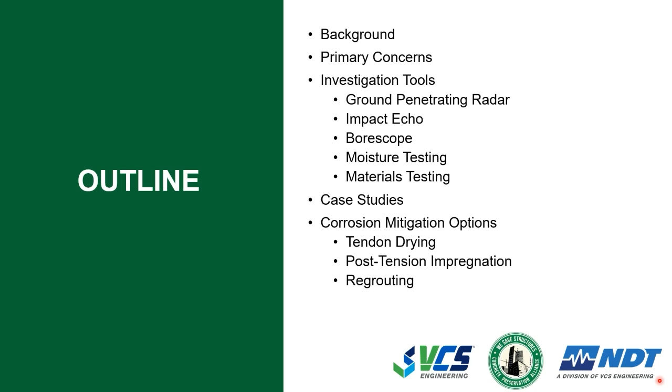In terms of the outline, I'll be going over a brief background of PT structures in the US and globally, what are the primary concerns they face, what are the typical investigation tools we use to probe the corrosion susceptibility of those structures. We will go over a couple of case studies and then into rehab options or corrosion mitigation options.

To dive into a brief background about post-tensioning structures, the concept of post-tensioning was first introduced in 1928 by a French structural engineer, Eugene Freyssinet. As a consequence of developing those ideas, the first post-tensioning bridge was constructed in France in 1941.

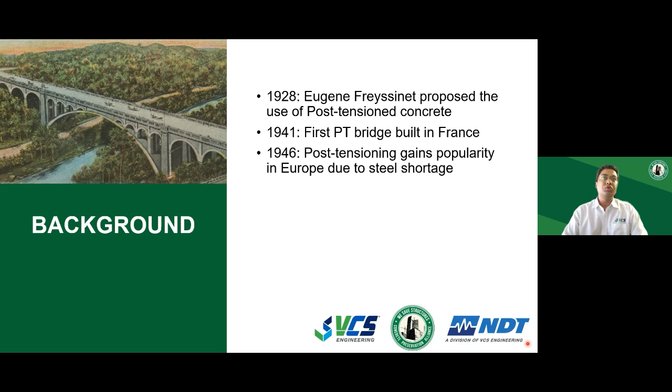Especially during World War II, where there was a significant steel shortage, post-tensioning structures gained popularity owing to the steel shortage, making the use of rebar less prevalent. In the United States, the first PT bridge was constructed during 1949 to 51 - the Walnut Lane Bridge in the Philadelphia area. These PT structures are structurally efficient and allow us to build really long spans.

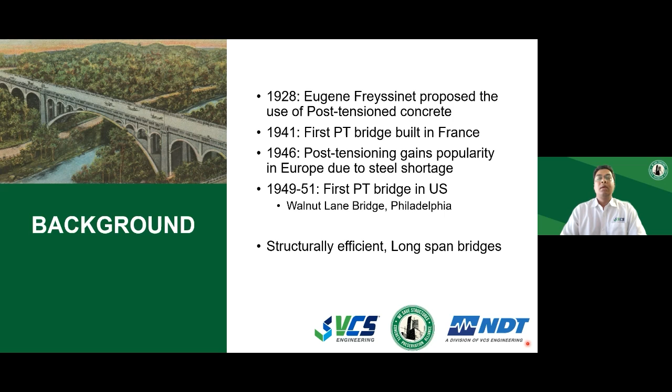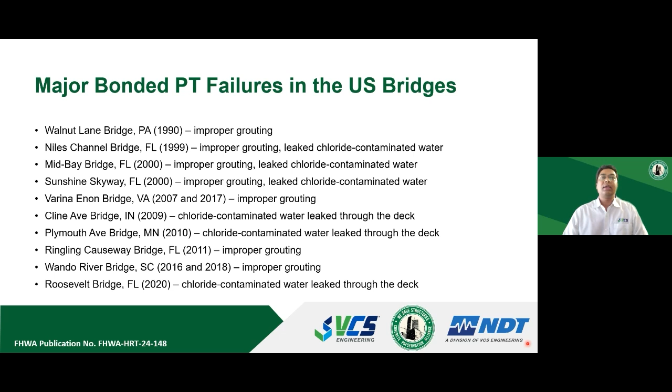In terms of history, I'd like to briefly go over the major failures that have happened in US bridges. If you note all of these failures, almost all of them can be attributed to either improper grouting or ingress of chloride contaminated deck runoffs. Essentially, when it comes to durability of post-tensioning structures, what matters is the homogeneity of the grout near the tendons and how well the voids were poured.

Speaking of causes that lead to PT corrosion, there are two main culprits. One is improper grouting operations or improper grout material. It can result from water bleeding or excessive water in the grout mix, or from segregation of the grout material. Sometimes, inadvertently or accidentally, chlorides might be added to the grout in the form of admixtures, resulting in higher chloride levels exposing the strands, which results in corrosion.

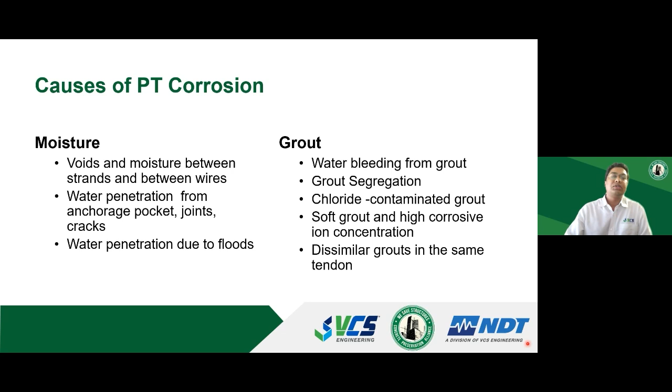On the other side, we have moisture and external contaminants, which can be introduced into the duct through end caps or through cracks in the duct. That can result in an environment very conducive to corrosion of the post-tensioning strand. I'll go over these concerns in the subsequent slides.

Here are some pictures which highlight typical failures. The one on top is a bridge in Pennsylvania. Here you can see the regular conventional steel reinforcement. You also see a post-tensioning duct that is completely eaten out or corroded, and now you have the strands exposed to chloride contaminated runoff from the deck.

Essentially, the rebar corroded first. It led to cracking and effectively spalling of the concrete, which created a direct path of chlorides to the metal duct, resulting in severe corrosion and heavy section loss of the duct. Effectively, that resulted in exposure of the tendons.

In the bottom images, you can see the external post-tensioning system where you have obvious grouting defects or voids in the duct that led to exposure of tendons to elements like moisture, chloride environments, or a lot of oxygen, which resulted in corrosion of the tendons. In some cases, the damage was so severe that the tendons were completely severed, resulting in complete failure of the tendon.

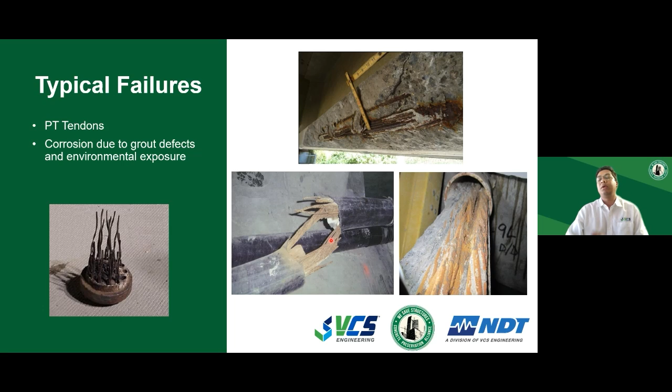When it comes to failures and segregation of grout or grouting defects, the profile of the tendon matters a lot. If we're talking about a straight profile, there's a high chance that during grouting operations the tendon will be uniformly coated with the grout material, which is of high pH, highly alkaline in nature, and that high pH or passivity can protect the steel from future corrosion.

Whereas if you have a deviated tendon, an inclined or vertical tendon, you tend to see grouting defects being more prevalent, especially because some sections of the tendon could be completely exposed while others are completely grouted. In the exposed sections, you have no protective oxide layer formed by the highly alkaline grout, which is why you see higher susceptibility to corrosion and eventual failure in those uncoated or unbonded sections of the tendons.

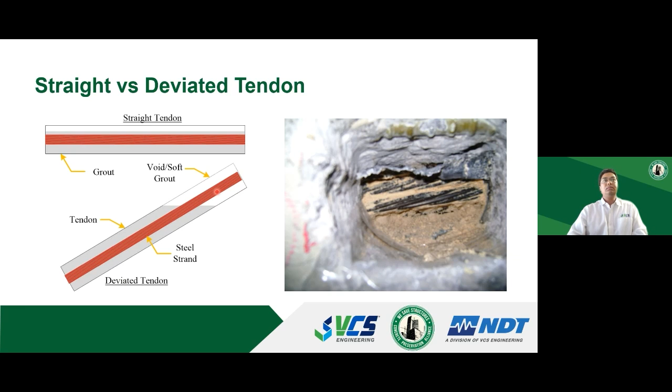Sometimes, when you have high amounts of water in the grout, that can result in segregation, where the heavier cement particles tend to settle down and cure or consolidate first, resulting in bleed water on the top layers. As you keep consolidating or curing the grout, it keeps pushing the bleed water up, and you get increasing water to cement ratio. As a consequence, you tend to see higher levels of contaminants or deleterious species like chlorides or sulfates toward the top because of the excessive water or higher water to cement ratio.

What it results in is incompatible material in the same duct. Even if the duct is completely full of grout, you can have segregation, and that will result in an incompatible mix where the top tendons are exposed to a very powdery grout, or a grout of higher water to cement ratio.

It can be clay-like, or when the water has completely dried out, it can be powdery material, and that provides essentially no strength or no bonding. Whereas at the bottom, you have really good bonding to the grout.

This chemical incompatibility and strength incompatibility can result in corrosion, where the top tendons can experience significant corrosion because of lower pH or lower alkaline environment, whereas the bottoms are completely immune to corrosion, especially because of the high pH grout surrounding them. So segregation and voiding defects are two key concerns when it comes to bonded post-tensioning structures.

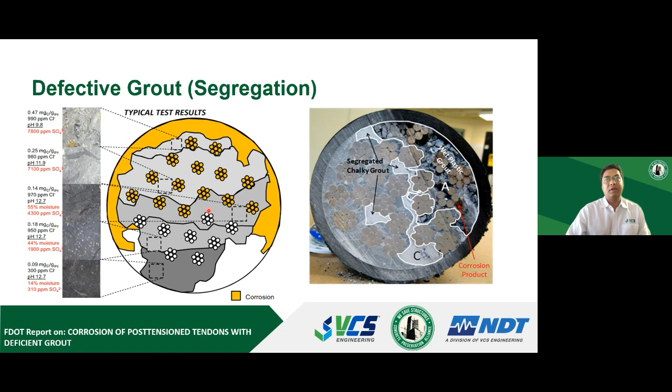Now we know what the key concerns are and what are the species that might lead to corrosion of the post-tensioning strands or tendons. We have some investigation tools at our disposal which we can use to probe the PT structures and see what the potential areas of defect are, or where the areas of issues are.

In today's presentation, I'll go over a couple of techniques for how we investigate the structure, how we probe the post-tensioning strands, visual confirmations. I'll go over ground penetrating radar, impact echo pulse velocity - which is essentially an acoustic technique - and borescope imaging. This gives us visual confirmation of our GPR and impact echo techniques.

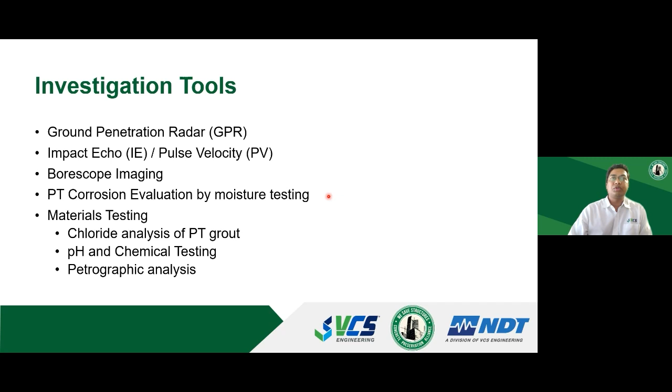Then we have moisture testing, which gives us the probability or the risk of corrosion the strands are at. And eventually we'll go into the material testing.

So to begin with, for all internal bonded post-tensioning systems, any investigation starts by locating the tendon, and we use ground penetrating radar to locate the tendon or the metal ducts. It's a fairly straightforward technique where you send an electromagnetic wave into the concrete and wait for the reflections to come back.

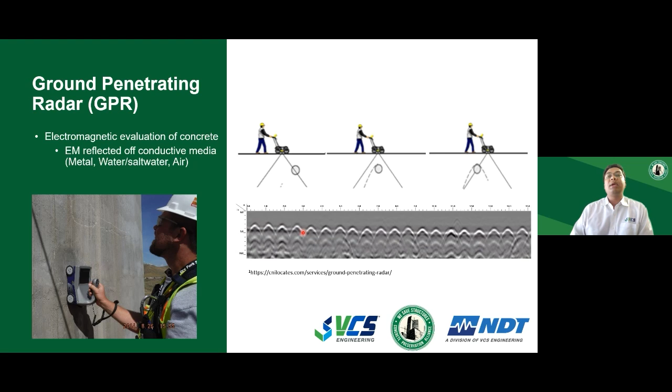On this chart or graphic you see here, each peak or each parabola is the presence of a steel object. That steel object can be reinforcing steel or it can be a post-tensioning duct. To an experienced eye, it's easy to discern between the reinforcing steel and the post-tensioning ducts just by looking at the contrast signatures or the peak signatures.

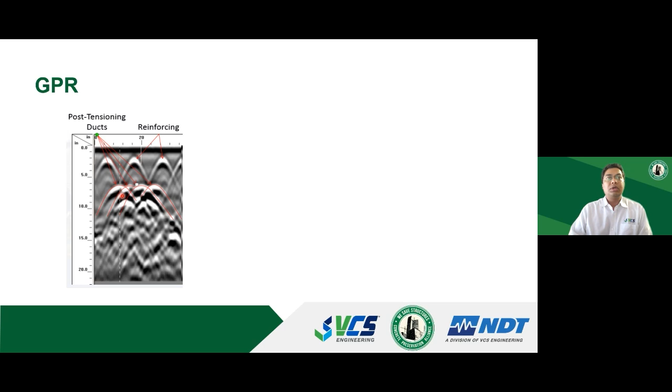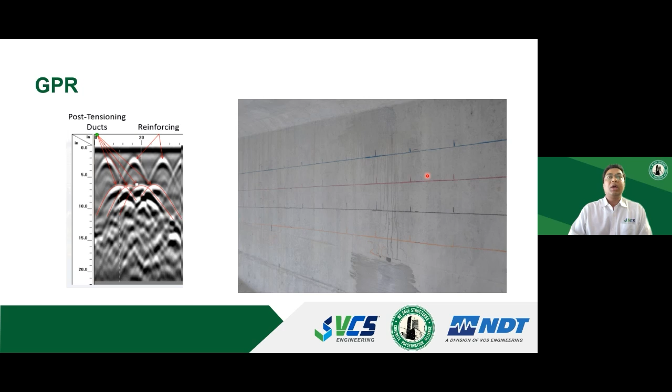Once you do the GPR scans, you lay out the drape of the tendon to track the profile of the tendon, and we mark that profile every 1 foot for subsequent testing using maybe sonic or some other testing. So once you lay out the profile of the tendon, you often use sonic or ultrasonic - we call it impact echo or pulse velocity technique.

Essentially, this technique relies on sending a sound wave, or a sound signal - you can call it a mechanical wave or stress wave - into the concrete and waiting for the reflections to come back from the back surface and also from the duct surface.

Essentially, you place the sensor and make an impact using a pneumatic impactor. You send the sound waves in. If the duct is completely full of grout, then you will have a quicker reflection, whereas if you have an air void or any voids present in the duct, then it might take a lot longer for the sound wave to come back to the sensors. This is essentially analyzed in the frequency domain.

Our device can do impact echo and pulse velocity both at the same time, but when it comes to applications for post-tensioning, we more often rely on impact echo than anything.

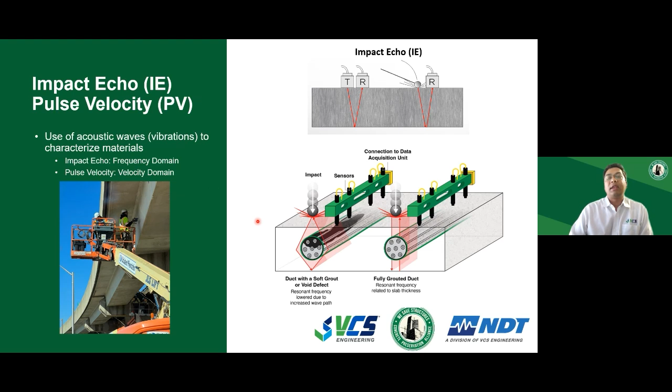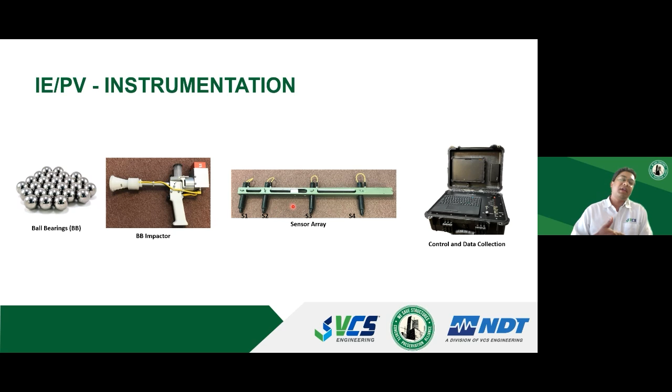In terms of instrumentation, as I mentioned, we use a pneumatic impactor. We use steel ball bearings to make the impact on the concrete surface above the tendon. And then we have a sensor array which has 4 sensors waiting for the reflections to come back, and that gives us the data.

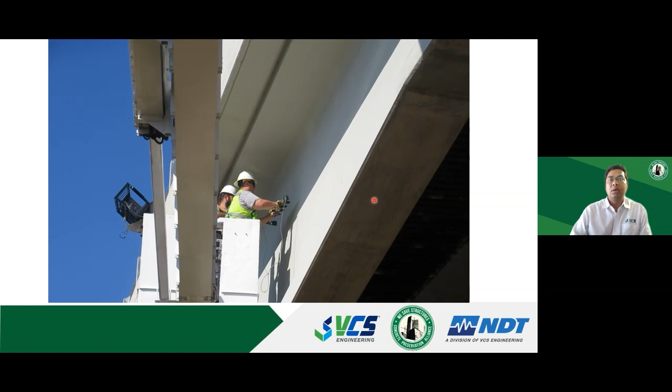So you make an impact, you place the sensor, make an impact, place the sensor, make an impact, and it collects the data while you're doing so. And you can see the pace of the testing - it goes pretty fast.

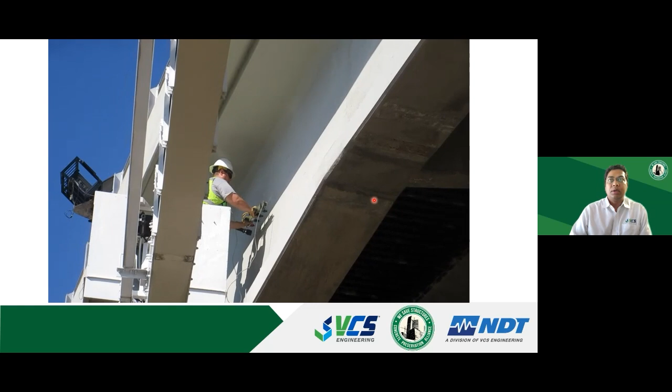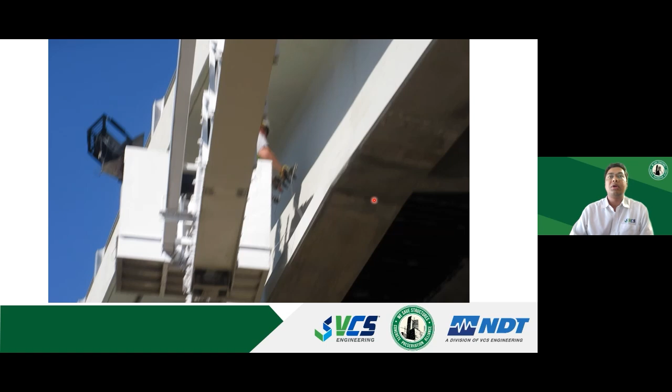So you lay out the tendon and do the impact echo testing - this is the system we use for internal tendons. We can use a similar system for external tendons where you have a transmitter and a receiver on opposite ends of the external post-tensioning duct, sending a signal from the transmitter and receiving that sound signal at the receiver.

You have an idea of the exact diameter of the duct, and that helps us know if defects are present and to what extent. Usually we do this testing at the 10 o'clock, 2 o'clock, 4 o'clock and 8 o'clock positions, performing comprehensive testing to see if defects are present and to what extent.

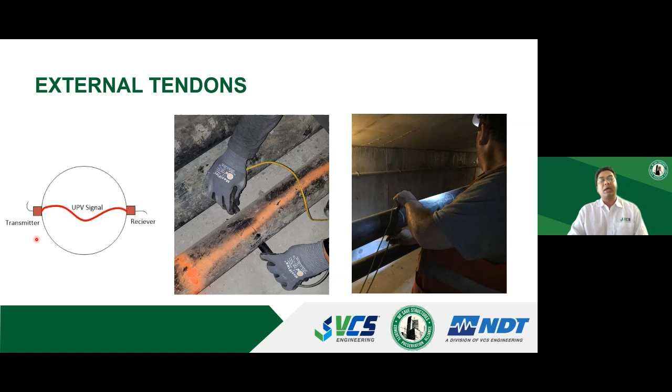Once you have identified the extent, location, or areas of potential defects, we need to visually confirm if the defect is actually present or if it was a false positive. One way to visually confirm the results of impact echo testing is using a borescope. We make an opening in the concrete, open up the metal duct, and put a pinhole camera into the duct to see if voids exist or not.

In most cases, if a void exists, you'll be able to put the camera through the duct and see what's happening inside. One of the images shown here shows the tendons completely coated with grout, but the rest of the duct is completely empty - you do not have any grout whatsoever, so there is a large void there.

In the second image, you see surface corrosion of the post-tensioning strands.

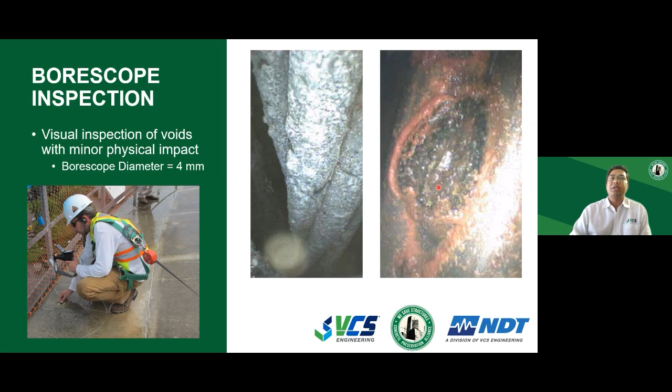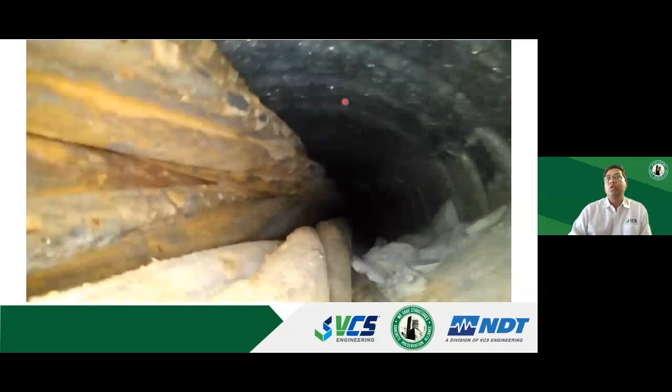This video is from one of the projects we were recently working on. You can see in the video that the top half of the duct has no grout whatsoever, whereas on the bottom half you see some history of grout, and you can see severe or heavy surface corrosion of the strands.

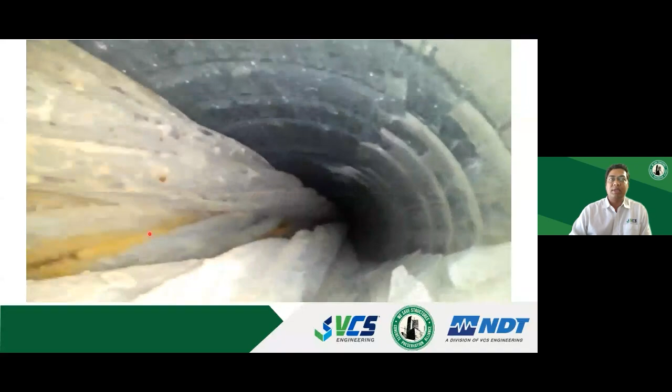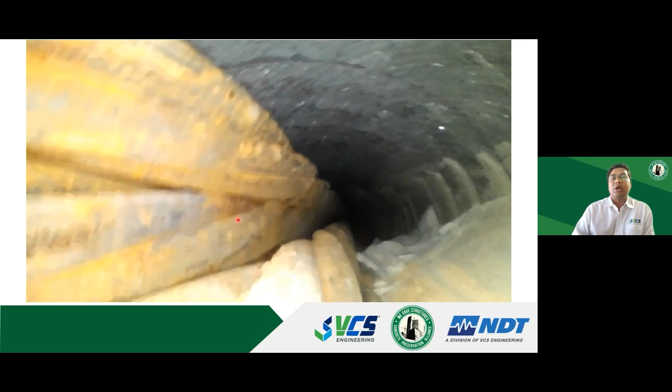In this case, since you do not have the high pH environment usually provided by the grout, you do not have any passivity or form of protection. So if moisture or chloride-contaminated water were to seep in, it will get directly in contact with the strands and start surface corrosion.

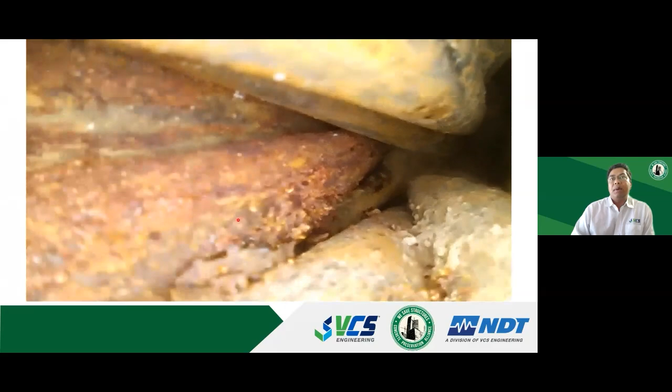Same project, another video that shows significant section loss and pitting on the strands - you can see these strands are heavily corroded.

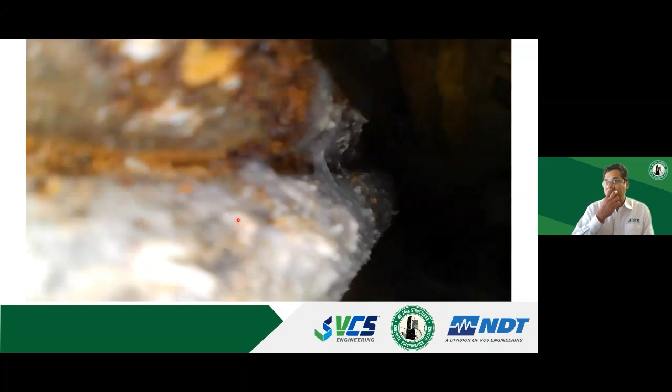Just the fact that you are able to put the borescope in should raise a lot of flags, because if you're able to put a borescope in, obviously there is a void present. If a void is present, the next question is whether the strands are corroded because of contaminants or moisture that may or may not have gotten in.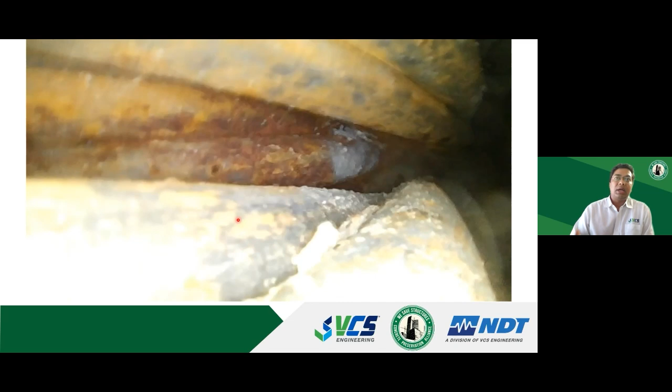Obviously you have a large void. The strands are completely exposed and you have no protection of any sort, and on top of it you have freestanding water. It's an ideal scenario where corrosion would most likely happen, and you can see some patchy corrosion already happening there. This is an alarming sign that failure is ought to happen in the future.

Another example is duct corrosion - it's completely voided, no signs of grout, and you have a Dywidag bar with severe surface corrosion. You have severe section loss in some other cases, but in all cases you can see that the borescope was able to go into the duct, which is a sign that there is a void present and you need to do something about it.

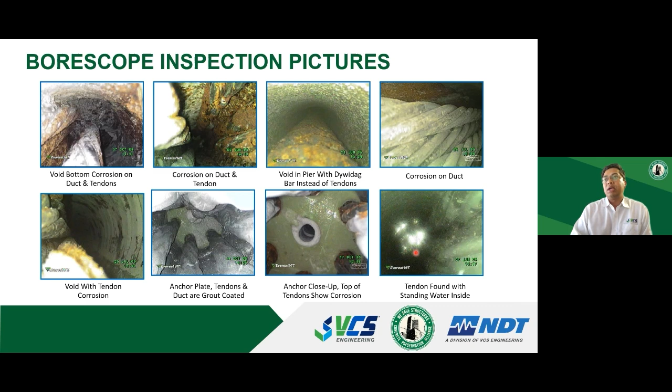If there is any freestanding water or if the relative humidity inside the duct is pretty high, there's a high chance that the exposed tendons will corrode. With increasing relative humidity or moisture, the corrosion rate goes up. The higher the corrosion rate, the more the section loss and the quicker it will occur. And if you have section loss, those strands will fail due to being under immense amount of stress.

To measure the relative humidity inside the duct, we use something called moisture testing, where you drill into the concrete and into the duct, making maybe a half-inch or quarter-inch opening. You have an in port, a similar out port, and a flow meter, and you push a dry gas through the duct. Essentially, we are trying to measure the relative humidity inside the duct using a dry gas.

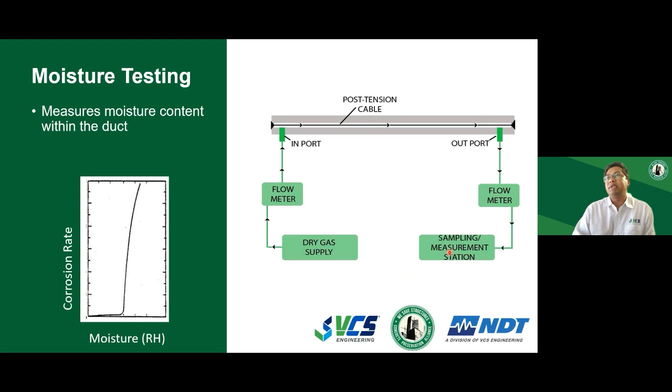Dry gas will absorb all the moisture it can, and we measure the moisture content on the output to see what the relative humidity inside the duct is. Based on the relative humidity, you can classify the tendon as dry, moist, or wet. If the relative humidity inside the duct is pretty low, you land up in a dry zone, which means the tendons are less susceptible to moisture-induced corrosion.

Whereas if you have a relatively higher humidity, your tendons might end up in a moist zone, where you have slightly higher chances of moisture-induced corrosion. And if the relative humidity is high, you land up in a wet zone, where you have an extremely high chance of corrosion being initiated because of moisture.

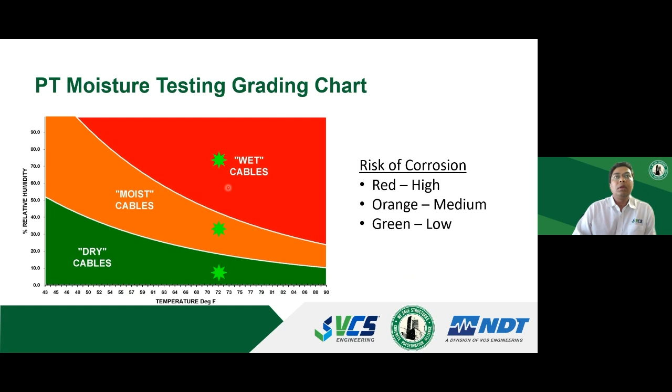Beyond moisture, there are other factors that affect corrosion, like availability of oxygen, presence of grouting, and so on. But knowing the moisture content gives a lot of insight into how much corrosion we can expect on the tendons. In addition to these tests, we often do material testing, which includes measuring the pH of the grout, measuring the chloride content of the grout, and doing petrographic analysis on the grout material. I'll let my co-presenter Natalia talk about it some more.

Thank you, Pratik. The materials testing that is typically conducted on grout samples is pH testing, chloride concentration testing, and less frequently, petrographic analysis.

pH testing is typically done at large openings where a section of the duct is removed to expose the grout. You can use a rainbow indicator solution, which changes color depending on the pH range, or you can use a phenolphthalein indicator, which is what you see in this photo. The phenolphthalein indicator changes color to pink when the pH of the grout is above 9.5, and if it's below 9.5, it remains colorless.

If there is a suspicion of environmental exposure to chlorides leading to chloride contamination of the grout, it's a good idea to test the chloride concentration of the concrete surrounding the duct, in addition to testing the grout. In this example, we collected 3 grout samples from different tendons. Sample 1 was collected at a high point, samples 2 and 3 were collected at low points of the drape. There was some leaking from the deck, and a concern that chloride contamination was coming from exterior exposure to chlorides, so we collected concrete samples near grout sample number 3, shown in the table below.

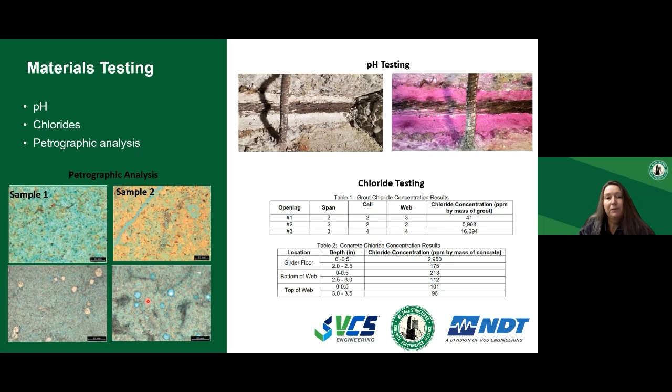So we're going to present 3 different case studies today that illustrate the use of different techniques that Pratik had discussed. Our first case study will be on testing of post-tension bridge piers.

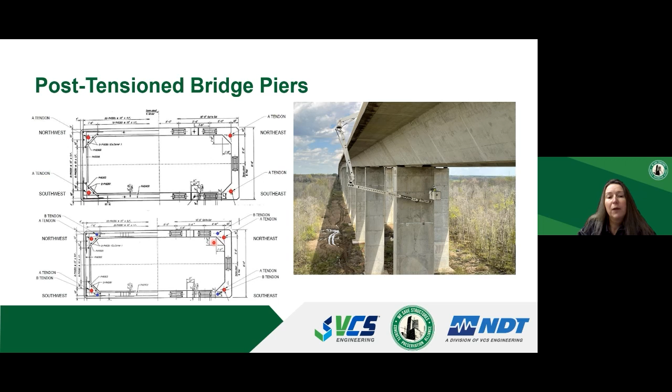This bridge is located in Virginia and uses U-shaped post-tensioning tendons in all the piers. All the piers have these A tendons, colored in red circles on the cross sections on the left side of the screen. The river piers, shown in the cross section below, have an additional pair of U-shaped tendons colored in blue circles, referred to as B tendons.

Next, please. Our testing focused on the 25 feet of the tendons at the top and bottom of the piers. For B tendons in the river piers, because they extended into the girder, we were also able to test them inside the girder.

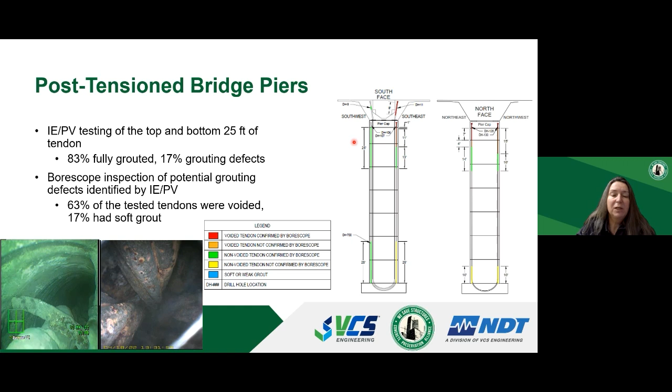We performed impact echo testing followed up by borescope inspection. As Pratik mentioned, impact echo testing can't differentiate between different types of defects. Grouting defects can be benign - lens voids or rind voids that do not expose the strands to the air, so the strands are fully coated. However, there is a void between the grout and the duct, and this will be picked up by impact echo testing as a potential grouting defect.

While other defects, such as voids that do expose the strands, and soft grout, create a corrosive environment for the strands. So based on the results of impact echo testing, we selected locations for borescope inspection, and this helps us differentiate between different types of grouting defects identified by impact echo.

Based on impact echo testing results, the majority of the borescope openings are located at defect locations, and we do some openings in fully grouted ducts as well for verification. So when the results are combined at the end of the project, we produce drawings, shown on the right side of the slide, where the tested tendon sections are color-coded based on impact echo and borescope results.

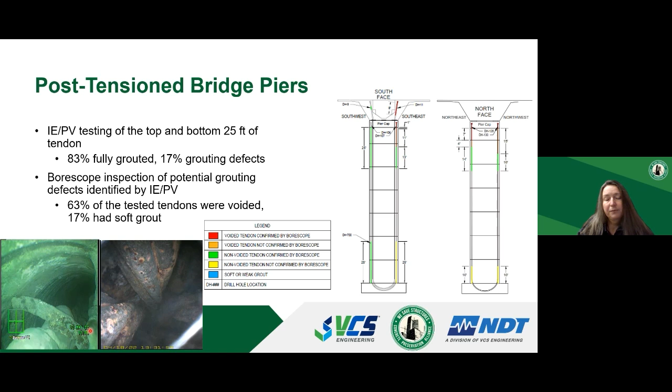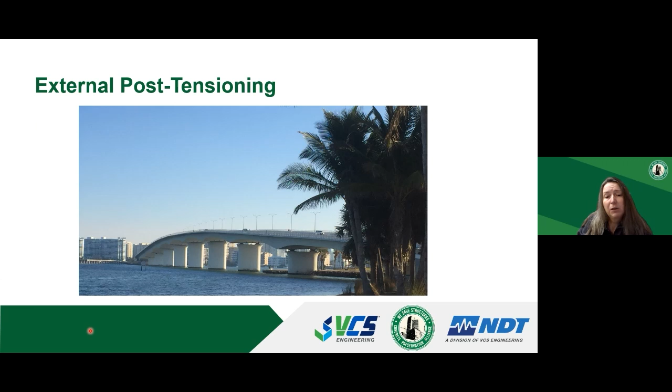Next. Okay, our second case study is going to look at testing of external post-tensioning. This is Ringling Bridge in Florida that uses external post-tensioning inside the girders. The investigation for this bridge was initiated by a tendon failure.

The photo on the left shows the impact echo testing of external tendons, and the image in the middle of the slide shows the impact echo and pulse velocity data that was collected on a fully grouted tendon.

Although our device collects the impact echo and pulse velocity data at the same time, for locating grouting defects we don't really use the pulse velocity data because it's looking at the time domain. We look at the impact echo data. The principle here is that the frequency with which the wave resonates in a concrete section is related to the thickness of the section.

When we have an internal or an external tendon that is fully grouted, we will be measuring the frequency that corresponds to the true thickness of that element - whether it's the true diameter of an external duct or the true thickness of the web or the deck for an internal tendon. As you can see in the middle image, the impact echo data shows a very consistent frequency for all the measurements.

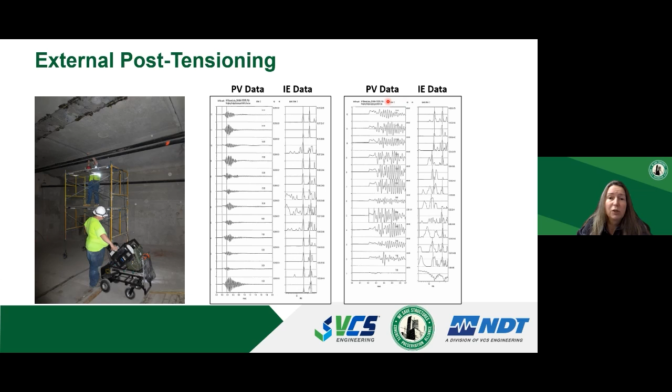Now, if we look at the image on the right, it's a very different picture. Here, the data was collected on a tendon with grouting defects, confirmed to have voids. If we look at the impact echo data column, the frequency is all over the place. There's a significant change in the signal shape that indicates scattering of the wave by the presence of the voids. Actually, if we look at the pulse velocity data as well, there's a significant change in the signal shape.

Next, please. So here the owner decided to remove some of the voided ducts, and these images show some of the duct sections that were removed from the bridge. Here we see a void at the top of the duct in both of these sections, and corrosion on the surface of the exposed strands.

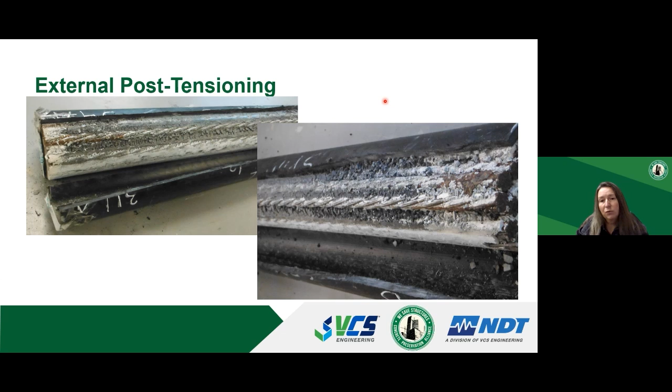In the third case study, we're going to take a look at evaluation of post-tension pier caps.

Impact echo testing can only be applied when the thickness of the element is 2 feet or less. At greater thicknesses, we're not able to locate grouting defects with our device. These pier caps were significantly wider than 2 feet, so we couldn't use the impact echo testing approach.

Instead, because the anchorages on these pier caps were easily accessible, we removed the pour backs and did visual inspections of the anchorages. As you can see on the slide on the bottom, we found some missing grout caps, and on the top, the image shows voids in the grout caps at some locations. Where there was missing grout, there was heavy corrosion on the anchor plates, as well as strand tails.

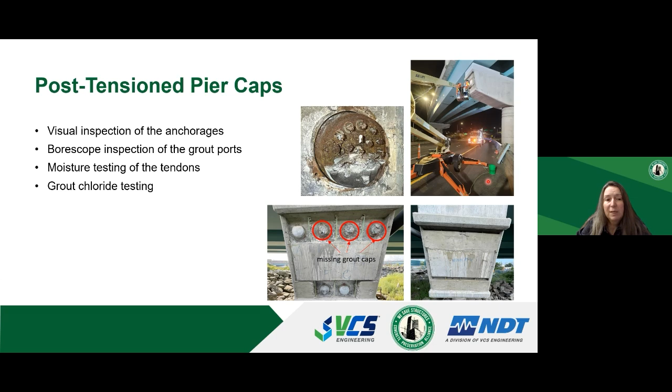So in addition to the visual inspection, we did borescope inspection of the grout ports, moisture testing of the tendons, and we also sampled the grout for chlorides.

This slide shows an image of the borescope inspection where the technician is feeding the borescope through the grout port. This was done on the grout ports that were empty. Obviously, we were not able to do it on grout ports that were full. Good news, the majority of the grout ports on this project were in fact full.

In the grout ports that were voided, 6% had lens voids that are benign and don't put the strands at risk for corrosion, and 13% were fully voided. At the bottom of the slide, you see some typical images from the voided grout ports.

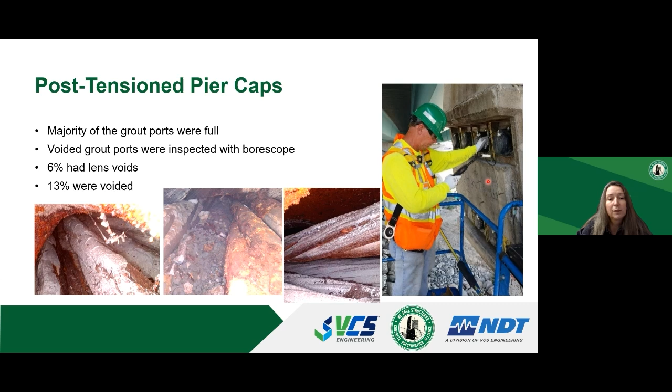We also performed moisture testing, where we pushed dry air from one end of the tendon to the other. As you can see on this chart, the majority of the tendons were in the dry-wet or wet condition, which puts them at risk for corrosion.

The chloride samples of the grout showed that the majority of samples had chloride concentrations below the corrosion initiation threshold, and only one sample had a high chloride concentration. This was because the pour back actually didn't cover the grout port at that location. It was left exposed, and chloride-contaminated water from the deck ended up getting in there.

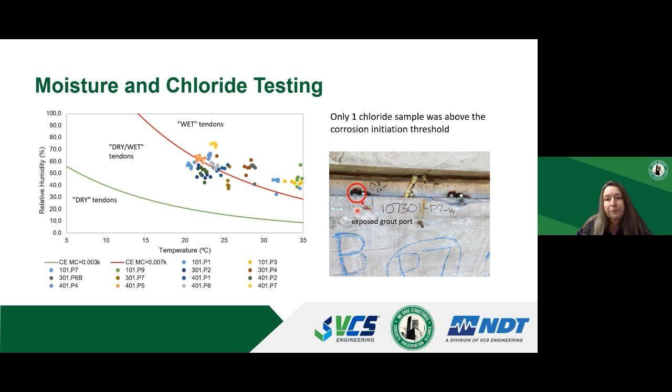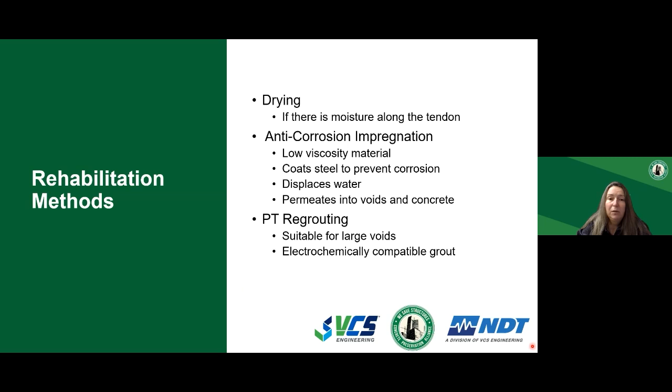So once we locate the different grouting defects, what can we do to mitigate corrosion of the strands? We have three different options: we can perform drying, anti-corrosion impregnation, or regrouting.

If there is moisture present in the tendon, if there's bulk water or high moisture, the tendon can be dried out. The PT drying process is very similar to the moisture testing process described. There is a supply of dry gas that's connected to an import, typically placed at the bottom of the tendon drape if possible. It's not always possible depending on the setup.

There can be one or two outports connected to a flow meter that is also connected to a moisture meter recording the relative humidity and temperature coming out. The dry gas supplied through the import pushes the air inside the tendon through the outports, and this process continues until the air inside the duct is dried out below the threshold line that separates dry tendons from moist tendons.

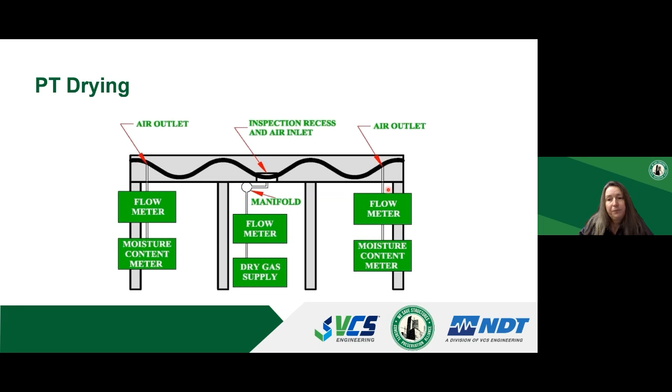This is an example from an actual PT drying project in Florida. This was done on a bridge that had bonded PT in the I-beam girders.

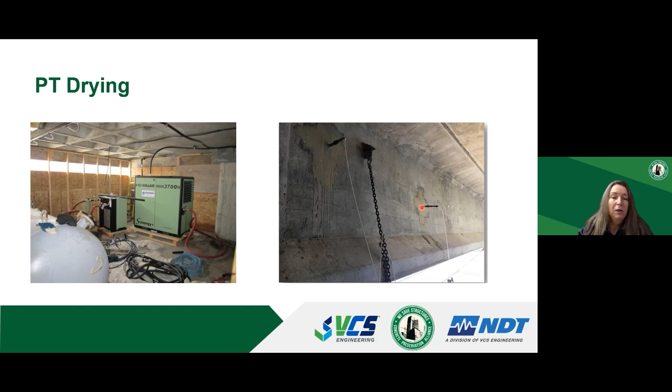On this project, we used a remote monitoring system, so that tubing was connected to this system being set up in this photo. The black case had a data logger that sent all the data to a website, so it could be monitored remotely.

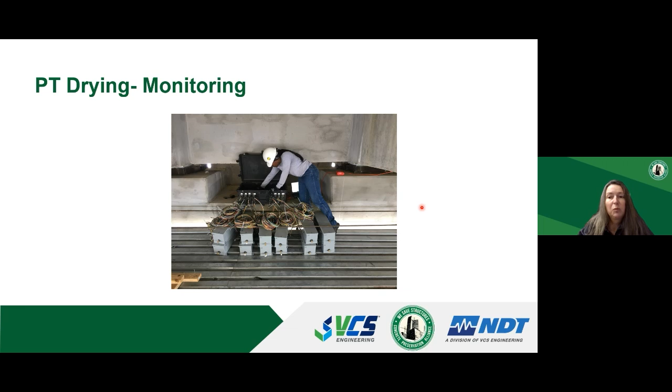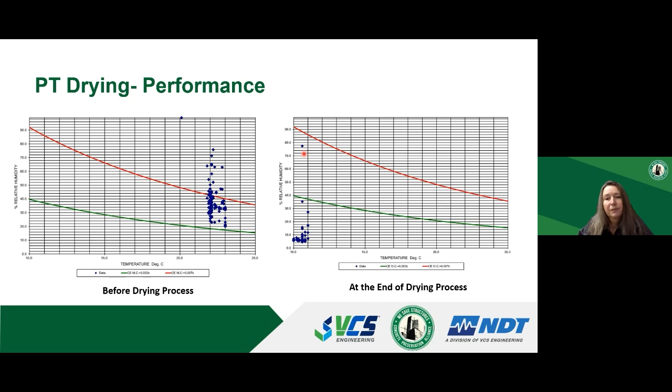The next technique is PTI, or anti-corrosion impregnation. This can be done when there are voids in the duct. If there's significant moisture, it's recommended to dry the tendon first before doing the impregnation. Impregnation is also very effective in addressing areas of soft grout.

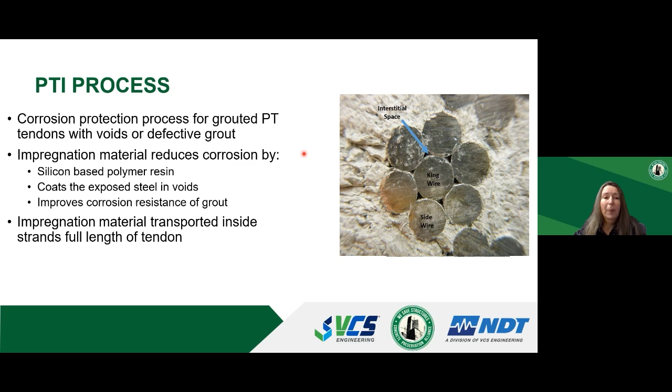During the impregnation process, a low viscosity silicon-based polymer resin is injected into the tendon. It can be injected through the anchorages or at any point along the tendon length. This material has an extremely low viscosity and travels inside the interstitial spaces around the king wire, coating the exposed strands in an anti-corrosion coating. This material will also penetrate into the voids surrounding the strands and areas of soft grout.

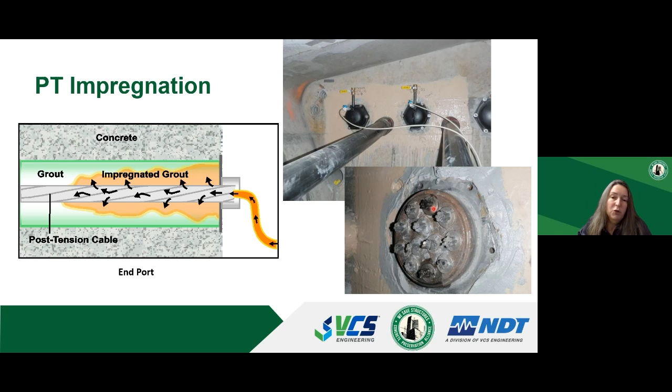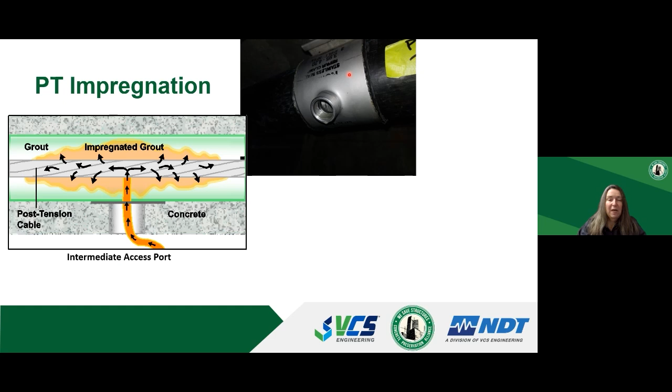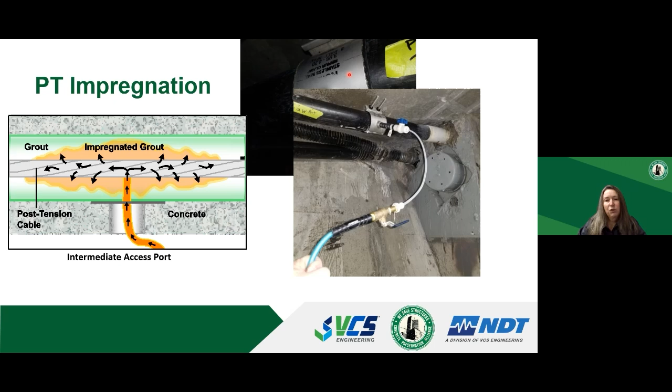This slide shows impregnation for an internal tendon at a point away from the anchorage, and the photo shows impregnation of an external tendon. For external tendons, there is a saddle attached at the impregnation point. An opening is made through the saddle, and then a port supplying the impregnation material is connected through the saddle, and the impregnation begins. After the saddle is removed, the impregnation can be confirmed.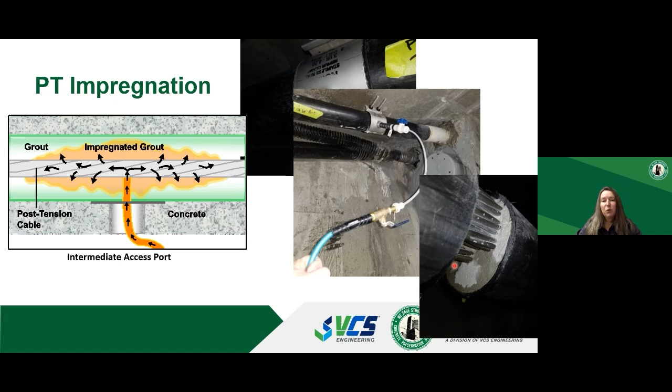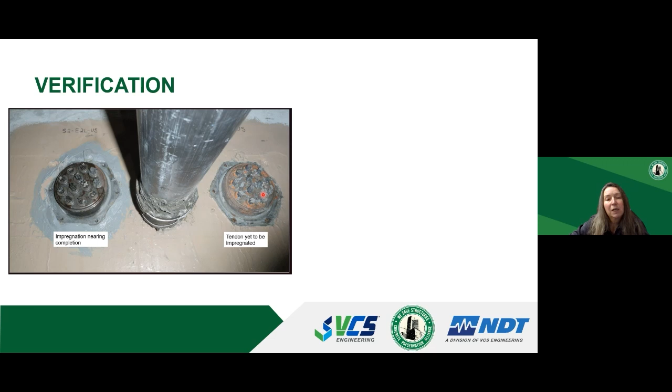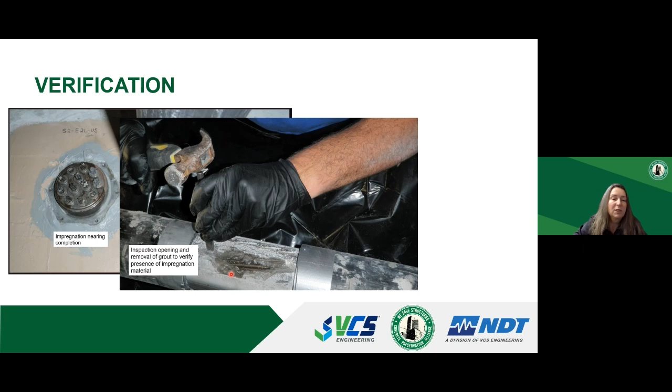Here is a verification of PT impregnation. Again, you have the darker anchorage on the left, coated in the impregnation material, and on the right for comparison is the anchorage that has not been treated yet. Here's another verification opening, again showing the darker color of the grout, confirming that the anti-corrosion material got to that point, and here's an up-close view showing the higher sheen of the strands from the coating.

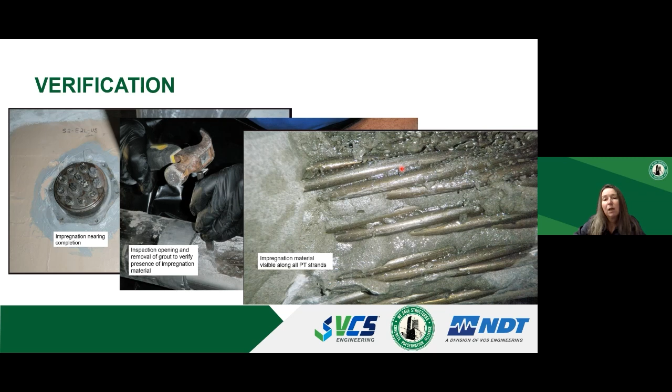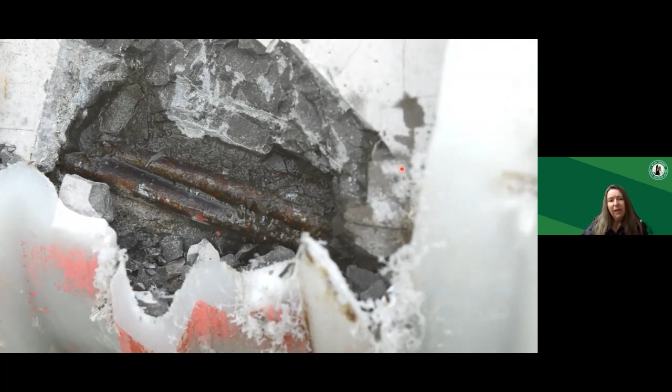This video shows the impregnation material bubbling through, as it's being pushed out at this opening.

Our last technique is regrouting. When there are large voids present along the tendon, the tendons can be regrouted. Grouting can be done using the positive pressure approach, shown here, where grout is pushed in from the low point and the technician watches for the grout to come out at the high point of the tendon drape.

Grouting can also be done using vacuum assisted grouting. The important thing to remember is that tendon regrouting needs to be done with a material that is electrochemically compatible with the original grout. So if cementitious grout was used during the bridge construction, a cementitious material needs to be used for regrouting as well. Otherwise, if the materials are dissimilar, it can create a corrosion cell.

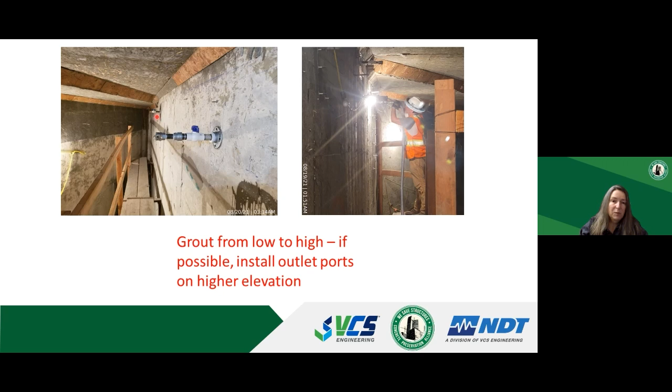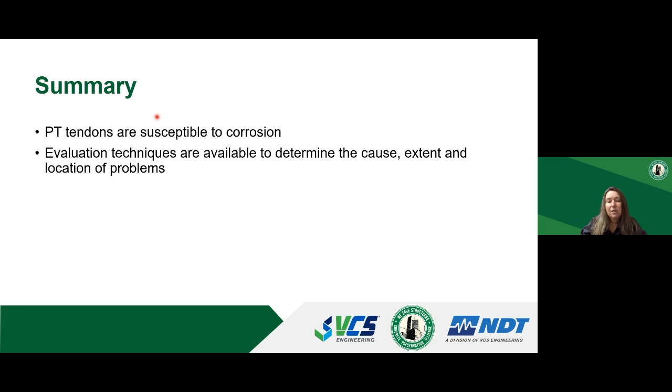In summary, PT tendons are susceptible to corrosion in areas of grouting defects, but there are evaluation techniques available to determine the cause, extent, and location of the problems. There are also corrosion mitigation strategies that exist to protect and extend the service life of PT tendons in existing structures.